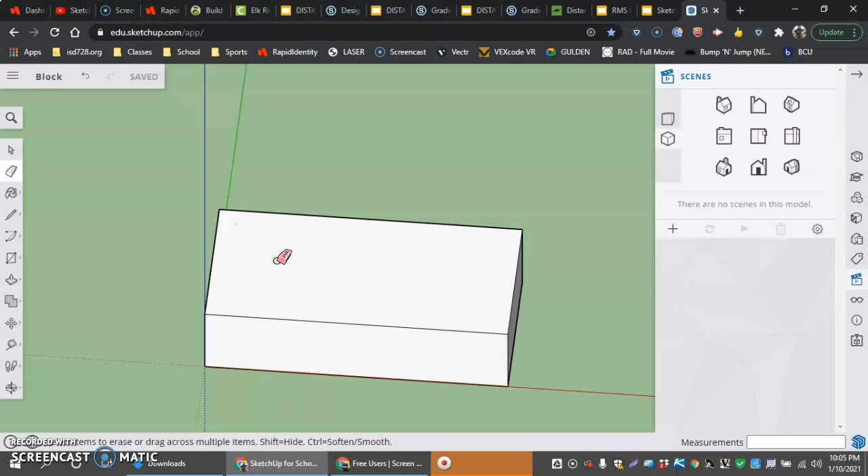So we're going to start with whatever orientation we're in here. We'll come in and click on the lower right ISO view. From there, zoom in or out to where you want to start working. I want to be able to see my top 4 lines right here.

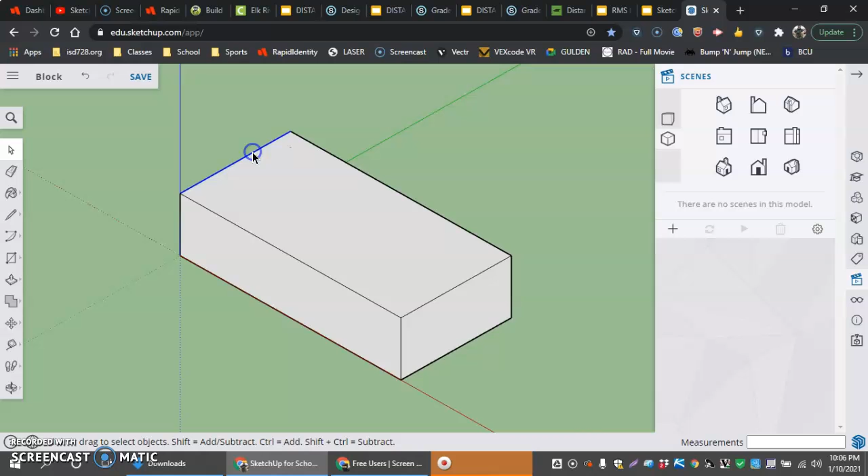What I'm going to do is select my line, right click it, and divide it into 4 segments. I'm going to divide the other side into 4 segments as well. Then on the 2 long edges, I'm going to divide them by 8 segments.

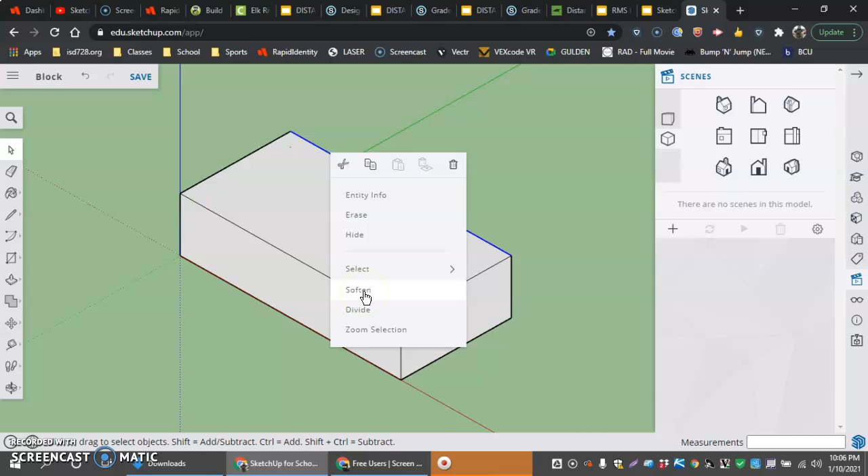The reason I'm dividing these is I want to have little endpoints for myself to click on with my tape measure tool to put my guidelines down. Once again, dividing that by 8 segments.

Now the next tool I'm going to use, and I haven't used it much yet, is the tape measure tool. The tape measure tool is great for layout.

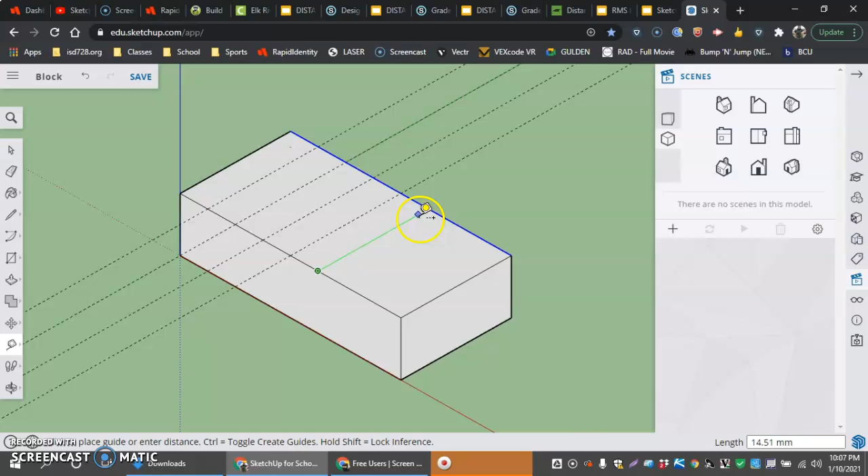Endpoint to endpoint, endpoint to endpoint, and I can kind of tell where they're going to end up being just because they're equally spaced, and it should snap it pretty close. Sorry, I misspoke earlier - the light blues are the midpoints. If you see those, we don't want to select those.

Alright, so I have 1, 2, 3, 4, 5, 6, 7 different lines going that way, and then I want to have my other couple going this way. So endpoint to endpoint, then endpoint to endpoint.

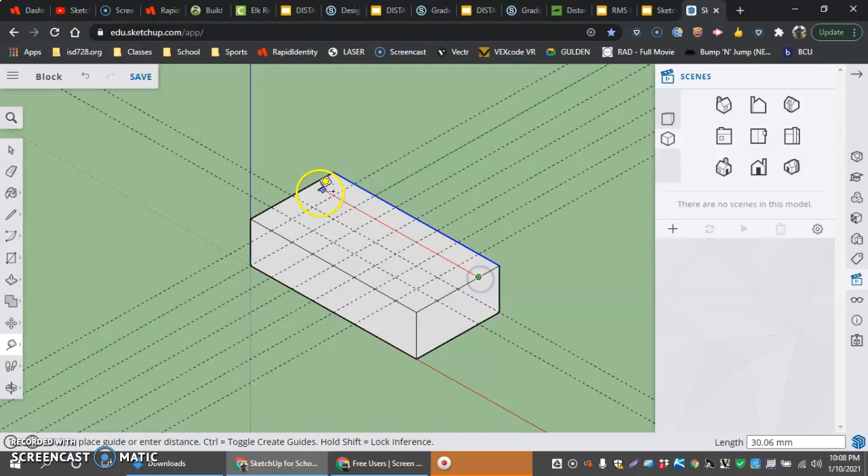Now that I have all these intersections down, I have my block ready to go for the next process, which is going to be making the circles on top - the little snap together pieces on top of our Lego brick.